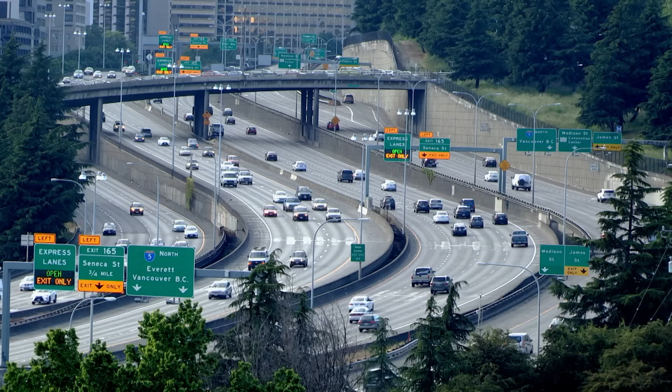King County, Washington State. Home to Seattle and Bellevue, hubs for the USA's booming tech industry. Where population is exploding and traffic is gridlocked. Engineer John Sleavin lives and works in a city pushed to breaking point. Seattle's experiencing some of its rapidest growth since the gold rush back in the 1800s.

We've had more tower cranes in Seattle than any city in the country for a number of years running. With a lot of major corporations in Seattle, the traffic's getting worse, the need for transportation is increasing, and the need for choices are increasing. The solution could be to link the cities by train. But in King County's unique environment, even railways face a problem.

One of the unique features of Seattle is its geographic terrain. There are a number of lakes that all restrict where and how you can place transportation services. And in particular, Lake Washington sits between downtown Seattle and Bellevue, both of which are high-tech areas that need to be connected. In a landscape strewn with vast bodies of water, Lake Washington is the largest and deepest. Here, traditional bridges just aren't possible.

When it comes to water, cars and trains are stopped in their tracks. Indigenous people used canoes to get around Lake Washington for thousands of years. 19th century settlers used ferries, bringing in so many boats that they became known as the Mosquito Fleet, clogging up the waterways. A more practical solution was required. But with almost 2.5 kilometers to cross and water and soft silt over 100 meters deep, neither a traditional bridge nor a tunnel could solve the problem. But engineers in Seattle have the answer.

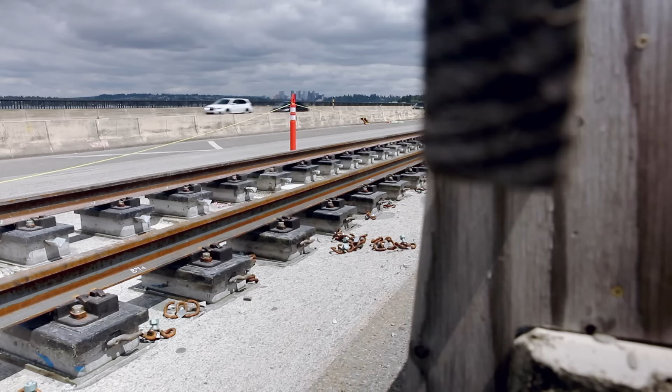These extraordinary buoyant bridges are capable of carrying 142,000 cars a day. But now they're entering the next and most challenging phase of construction. Adding a state-of-the-art train line and creating the planet's only floating railway bridge. What makes this project so exciting for me is nowhere else in the world has this ever been done. It's floating, it moves. We're essentially putting rail on a marine vessel. It's a very unique engineering achievement.

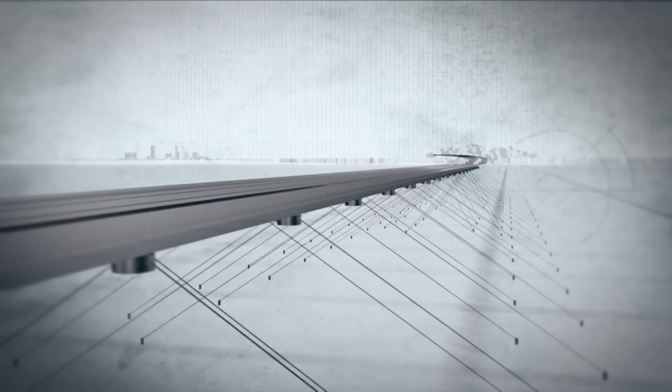With a massive 324,000 tons of reinforced concrete, the twin floating bridges weigh more than 52,000 elephants. All that weight is floating on 38 monster pontoons, with nothing but 64 meters of water below the surface, crossing a span of nearly 2.5 kilometers and capable of supporting the weight of high-occupancy rush-hour traffic. The finishing touch will be a revolutionary railway line, a world first on a floating bridge. Once this system is commissioned and in operation, this will be an engineering feat like no other.

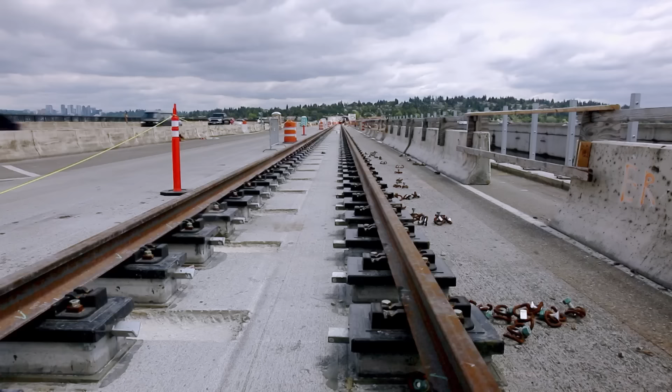But this ambitious project poses huge engineering challenges. How do you connect a railway from land onto a floating and so moving bridge? If those rails were just attached on either side, that continuous connection would experience all those movements in one point and would probably snap the rail. What happens when you introduce a high voltage current to a structure in water? There is a risk of stray current escaping from the rails, which could get into the critical bridge structure.

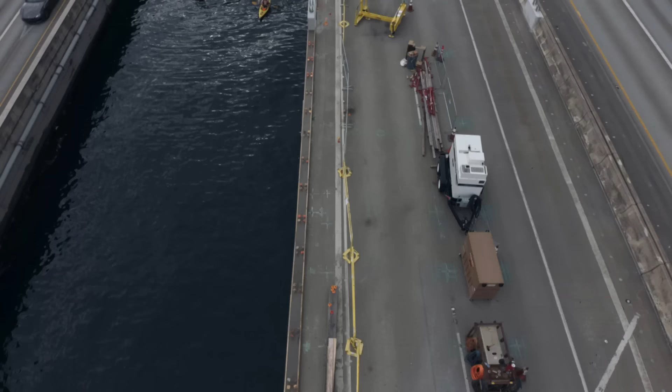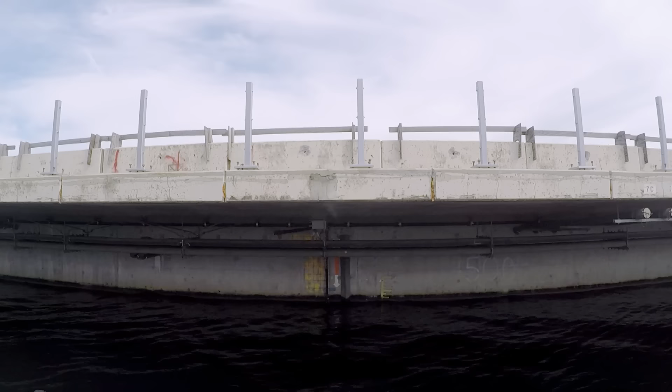And how do you make it strong enough to support 300-ton trains? We can eccentrically load the bridge and potentially crack it. That would not be good. But the biggest problem of all, how to keep the concrete superstructure afloat. It is very important that if there's any water intrusion, that won't sink the whole bridge.

Engineer Jim Stonecipher knows all too well the daunting complications of building on this lake. The lake is deep, and being in earthquake country, we need a good material to set our foundations in, and it's just not available on the bottom of Lake Washington. Before you can get to some good material, you have to go through silty sand, and so you might end up with a column that's 500 feet deep.

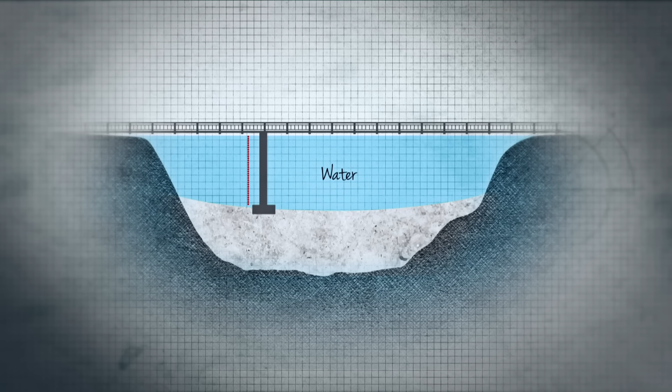Even if engineers were to sink support columns through 65 meters of water, they would hit a soft lake bed made of silt and clay. Pillars would need to go through another 50 meters of sediment to reach a solid footing. Add the column length needed above the water, and all this makes for an incredibly expensive and unstable structure.

On the engineering side, it would be difficult to build a standard cable stay or other type of bridge in that area. It takes a unique kind of bridge span to span Lake Washington. So the engineers' only option is to float the bridges. But how can they ensure the giant concrete structure doesn't sink? The answer lies with a pioneering innovation of the past.

On the Caribbean island of Curacao, local engineer Albert Zweste is exploring how a clever piece of engineering could help the team at Lake Washington. We are located here close to Panama, where they have the Panama Canal. So the island is strategically located for the shipping routes and for trade. The island's main town, Willemstad, was a perfect port. But by the mid-1800s, the deep natural harbor was creating a problem.

The town is separated in two halves, but about 4,000 people per day needed to get across. And they did it in small boats. And you can imagine it was a time-consuming and not efficient process. But the channel is 150 meters wide and 15 meters deep, with a soft sandy seabed, making most bridges impossible to build, especially one that allows the passage of ships into the harbor.

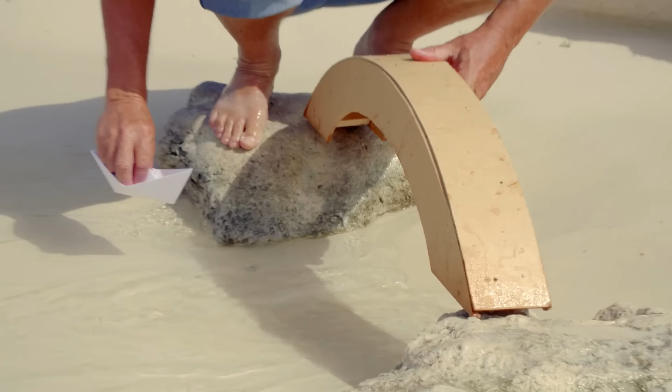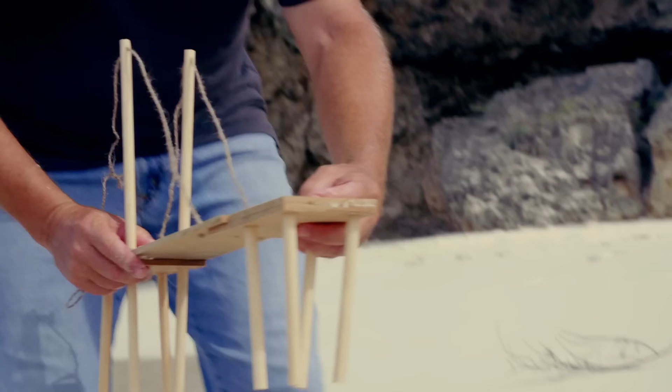The arch bridge solves the problem for vessels coming in, but only small vessels. An arch bridge would be expensive to create the arch and to make it high enough for larger vessels to come in. The bascule bridge is an option that gives us the possibility to open it and let traffic go in and outside the harbor. It doesn't need to be that high. So we can pull on this, open it up, and my vessel can go in or out.

The problem with the bridge is, though, I need heavy foundations in a town that's already been built, in a deep channel with soft foundations. So this bridge, although beautiful, is not an option for this site. But when American ice merchant Leonard Burlington Smith sailed into Curacao in 1876, he had the answer. So this is what Smith came up with.

This is the Queen Emma Bridge, a wooden pontoon bridge with 17 pontoons stretching across this channel, the Anna Bay. Affectionately known to the locals as the Swinging Old Lady, it's one of the oldest pontoon bridges in existence. This bridge uses about 600 tons of wood, each pontoon 15 tons of steel. You see it moving? We are now completely floating on the water.

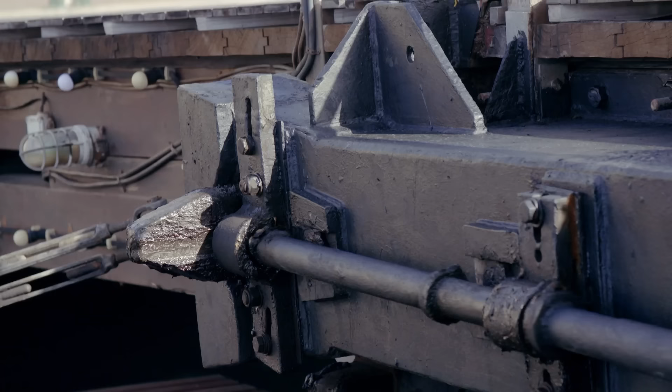But the brilliant pontoon design not only allows for transit between each side, the floating bridge has another trick up its sleeve. We've got a boat coming now, so we need to open the bridge all the way up to let this boat get out to sea. The impressive 167-meter bridge span is hinged at one corner and swings open, allowing boats access to the harbour.

To be able to open the bridge, we have two motors, one in forward, one in reverse. Together they push and open the bridge. We get oil tankers, we get container vessels, we get cruise vessels come in here, all kinds of vessels. It was genius. It was a quick solution, an efficient solution, and a relatively cheap solution. Smith's design was brilliant in its simplicity. Located just beneath the public concourse lie the vital components that will prove significant to the engineers of Seattle.

Okay, we're here on one of the pontoons. The pontoons are the most important feature of the bridge. All this weight is carried by the pontoons. No columns are needed to anchor this bridge into the sea bottom.

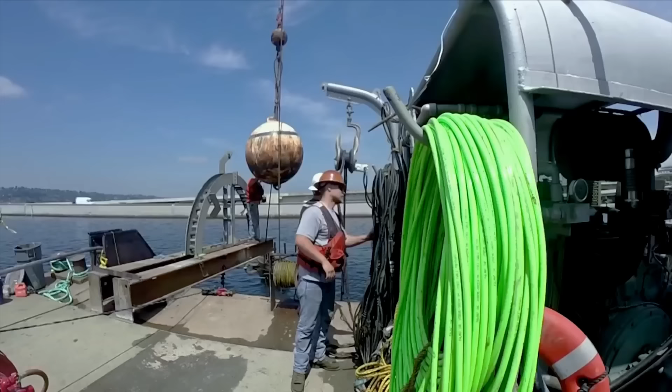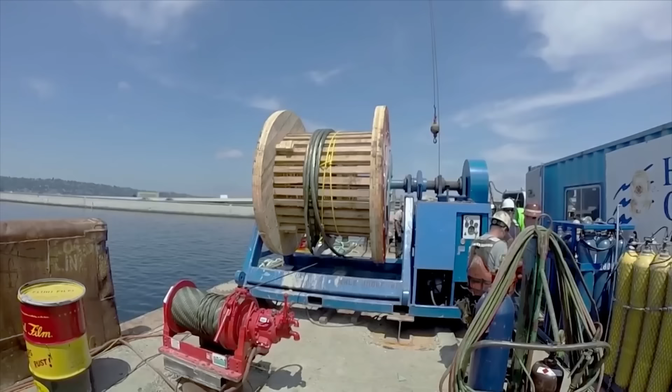Buried in the lake bed, movements from the bridges put immense pressure on these anchor cables, causing them to fray. Nope, I got a cable here. So, to prevent catastrophe, a team of divers working at depths of up to 165 feet are currently replacing damaged components. The anchor cables are very heavy, and it takes a real big team to get those anchor cables in place. So far, 32 huge new cables have been installed.

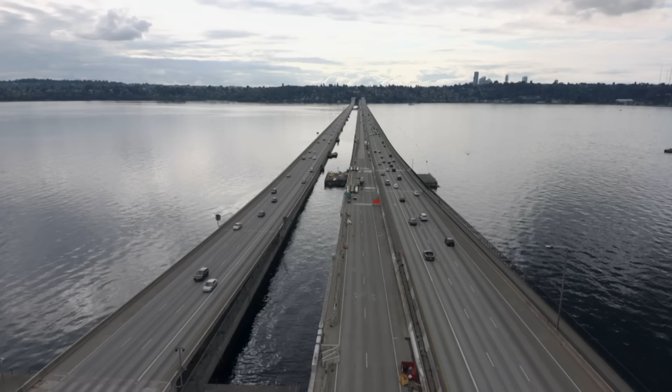But seasonal change means that monitoring them is essential. From summer to winter here on Lake Washington, as the lake raises and lowers, the anchor cables become slack or tight. And we don't want increased pressure on the bridge, or we do not want the cables to be slack. A rupture in the cables could spell disaster for the bridge. So it's crucial that, as the lake's water levels change, the anchor cables are adjusted to the correct tension.

So now we're down inside of one of 18 pontoons. Watch your head, a little rough. We're walking in through the anchor cables in one of the segmented compartments of the pontoon. And this is the anchor cable on the pontoon. This particular anchor cable is 579 feet long. To haul such an enormous cable in these tight spaces, you need a compact yet powerful piece of equipment.

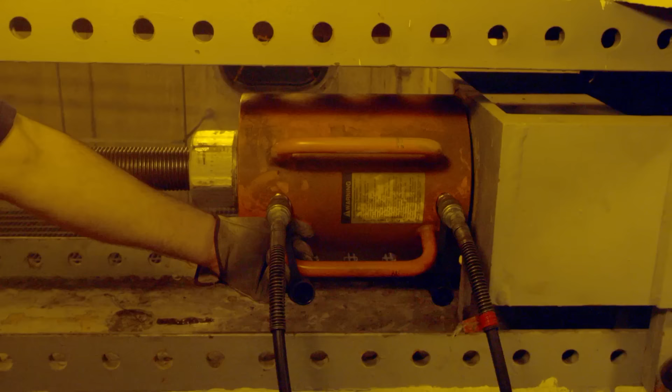So this is the jack that we use to actually make the adjustment. This is a 150-ton ram. We use this to either extend the cable out a little bit or bring the cable in to maintain a 65-ton average on the cable. The jack pulls with phenomenal force, but all Jim has to do is press a button. So you can see the travel of the cylinder right there. We're actually very slowly pulling the cable in.

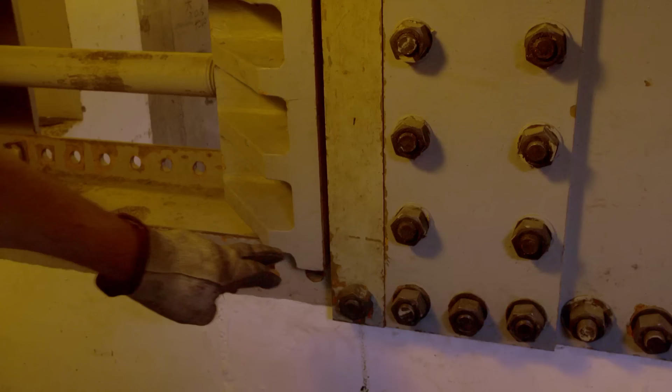Over here in the other room, you can see we have this air gap between the jacking plate and the jacking head. And so we're actually pulling the cable into the pontoon. So now we've gained about an inch. So we're gonna put shims in here. These steel plates will bear the load when the jack is released. Right now, this time of year, we only have to move it probably an inch. In the spring and the fall, we'll move it about 6 inches.

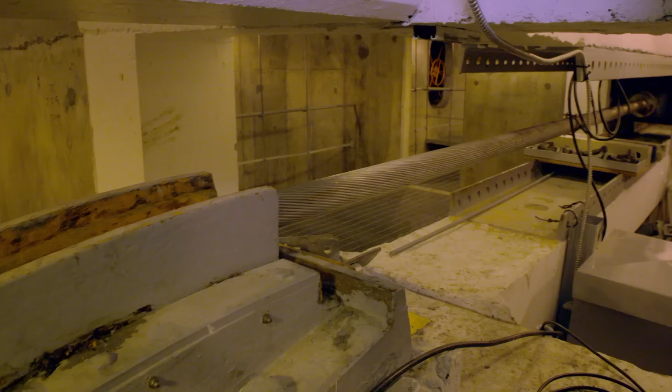Adjusting the 110 anchoring cables is vital for keeping the bridge in alignment and maintaining a safe road surface for more than 50 million vehicles every year. So if we didn't have these anchor cables, eventually this bridge would float north or south depending on which way the wind's blowing. End up maybe in somebody's backyard, and that'd be a pretty big dock for them.

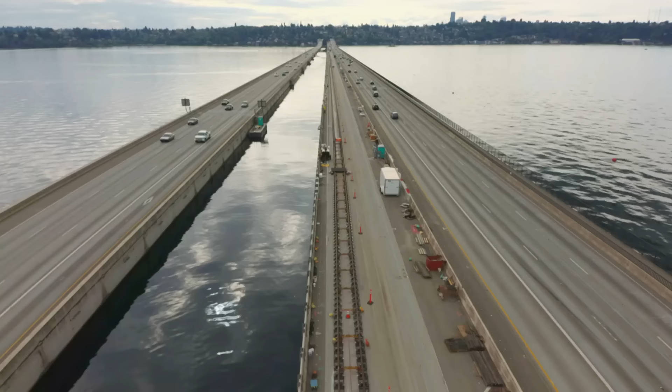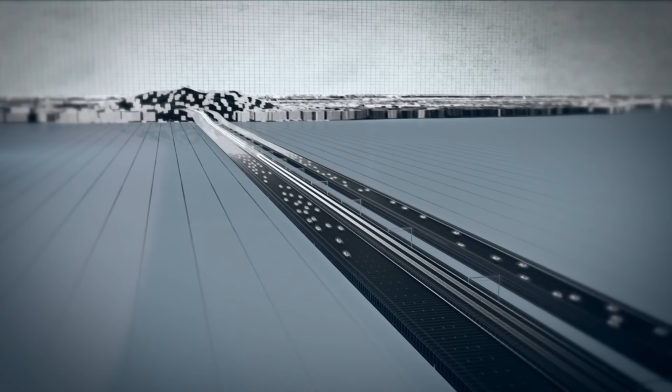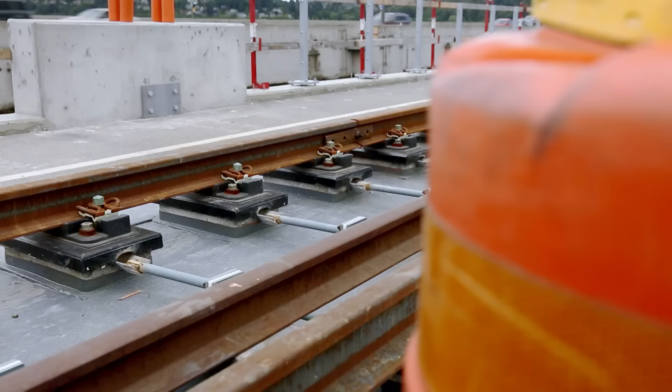Across a combined bridge span of 4.8 kilometers, these 38 jumbo pontoons support a lifeline for millions. Without these incredible floating bridges, the city would be gridlocked. Construction of this groundbreaking project is underway. To my right is the first set of tracks. There'll be 2 sets of tracks here when the construction is complete.

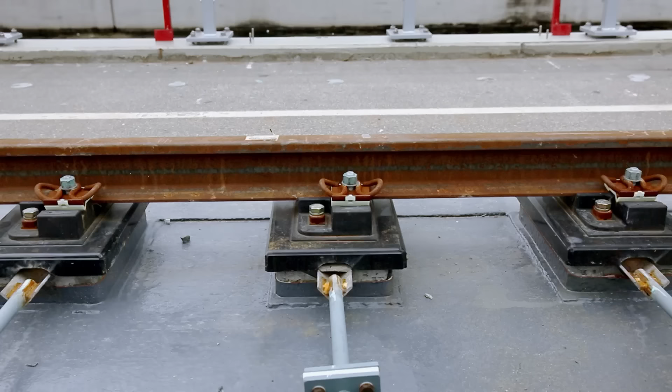But the new tracks create a unique danger that engineer Craig Delala must overcome. The rail system is powered by a 1500-volt DC system. The return path for that current is the rails here. Nowhere has anybody put a 1500-volt rail system on a floating bridge in the middle of a lake. But water and electricity famously don't make a good mix. If electricity escapes the tracks, it could spell disaster for the bridge.

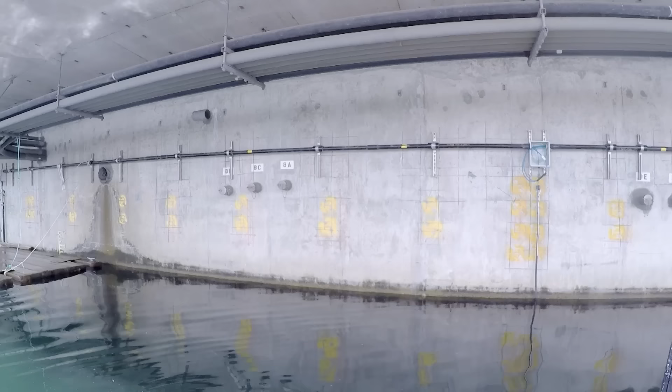Surprisingly, the danger isn't one of electrocution, but of corrosion. So anytime you have a steel structure, the risk of rust or corrosion, which is the loss of metal, could impact the bridge. By introducing rail to the floating bridge, it further increases the risk of corrosion to the bridge and the bridge structure. When that current discharges into the water, it can corrode crucial components at the exit point, threatening the integrity of the very bridge itself.

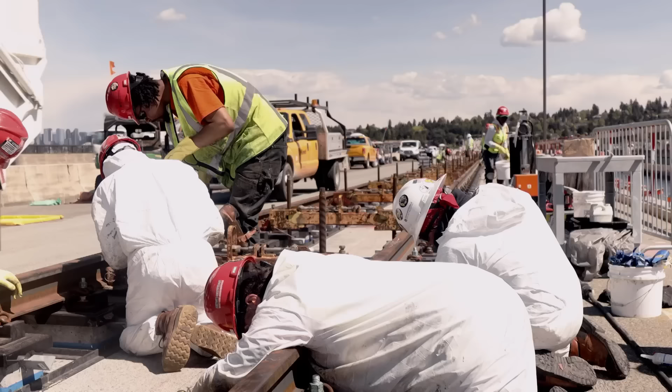For this world-first construction project, Craig's team needed to come up with entirely new methods to eliminate destructive stray current. So you'll see here that there's multiple elements of isolation, including plastic pieces here between the track and the fastener. We also coat the bridge with a special dielectric material that is also a high insulator for electricity. And so with these elements, we are able to protect the bridge from any stray current ever making its way onto the bridge.

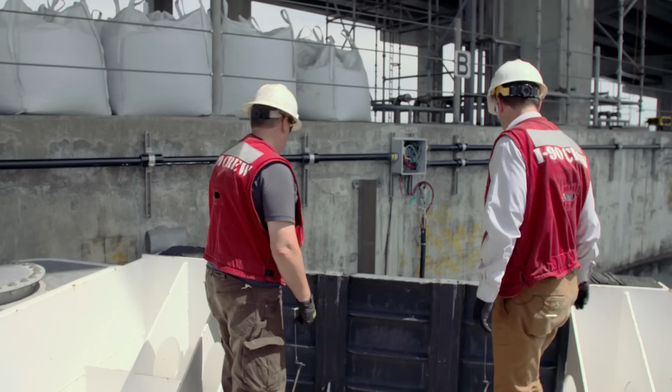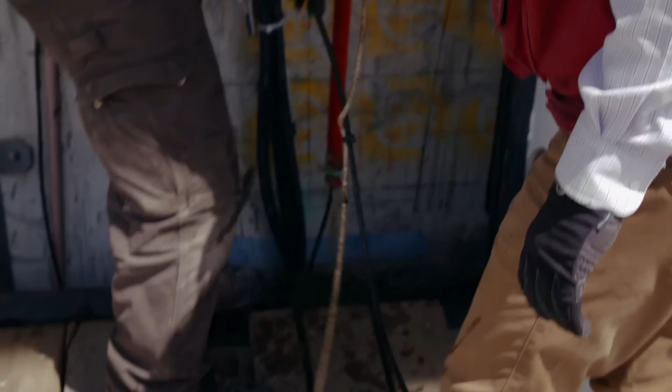But with this mighty structure at stake, engineers aren't taking any risks. To move these barriers out of the way. Should any stray current make it through the first line of defense, there's a backup plan. This is going to be harder. The anode assembly is the one without a tape here. Okay. So what we have here is the anode coming out of the water.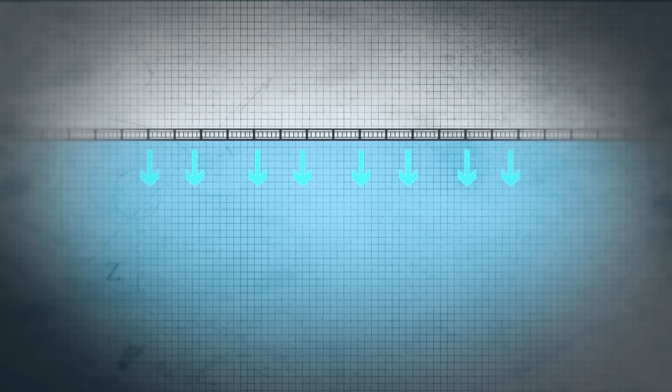There's 8 of these that hang 50 feet down into the water. These are mixed metal oxide anode assemblies. These put current into the water, which is drawn into the bridge and allows the bridge to polarize. Left unchecked, stray current could enter the lake through bridge metal. But over 1,400 anodes feed another electrical charge into the water. This protective flow drives into the bridge structure and holds the stray current at bay, saving crucial components.

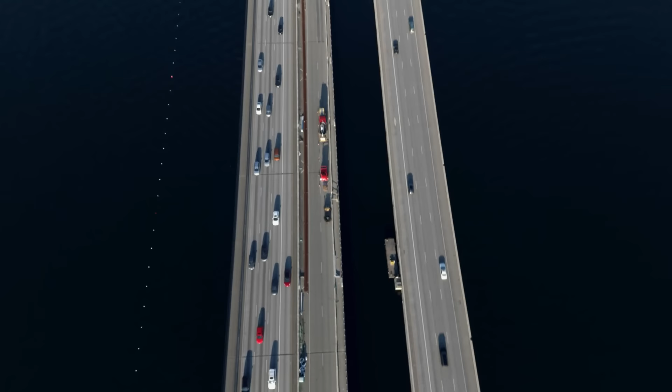Without corrosion control, the life expectancy of the bridge could be shortened. Applying it to a floating bridge like this is really something extraordinary. The danger of corrosion has been eliminated. But as rail installation advances, an entirely new threat looms over the project. So right now we're about to go across the bridge. Keeping the mission on track is engineer John Sleavin.

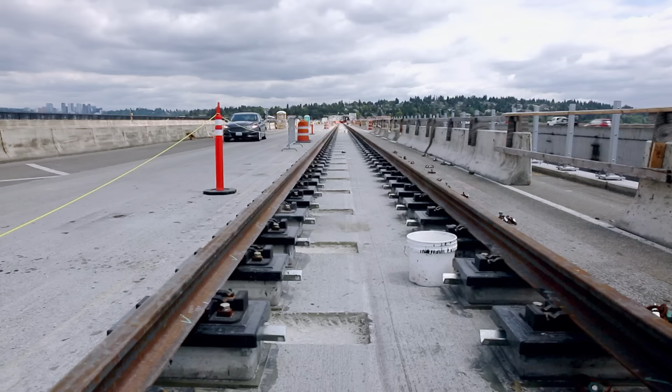As we transition to a floating bridge, we are on a floating structure. And just like any marine vessel, it tends to move a little. Now for an automobile with rubber tires, they can go across an angle point or a bump quite easily. And this is very difficult for a train because steel rails need to be continuous. They can't have break points or angle points that could potentially derail a train.

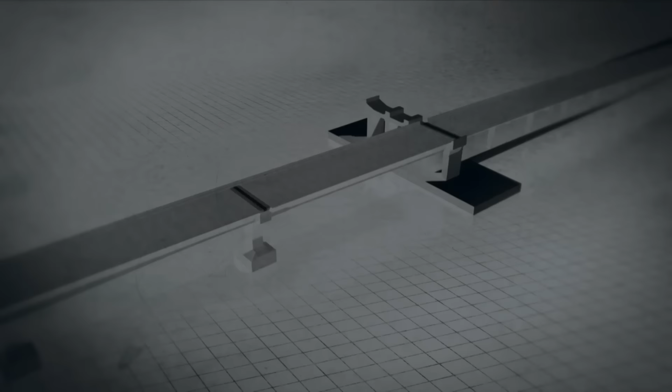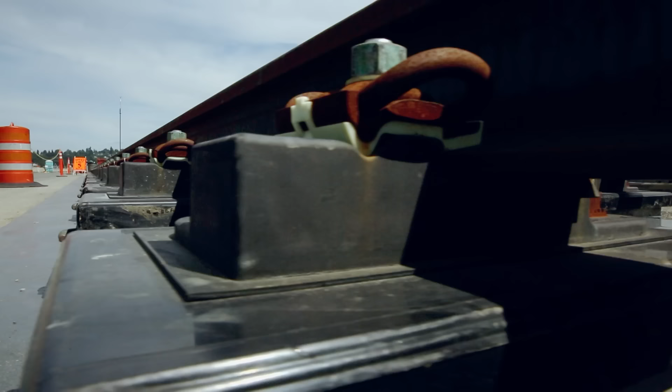The floating bridge needs to contend with a range of movement caused by lake levels, wind, and uneven traffic loading. This stretching and twisting at the joints constantly changes the transition angle, threatening a track misalignment between lake and land. For 800 passengers on a speeding train close to heavy traffic and deep water, this could be fatal. We need to find a solution across that expansion joint that's critical to the operation of the rail. To evade a devastating derailment, John's team must connect with innovators of the past.

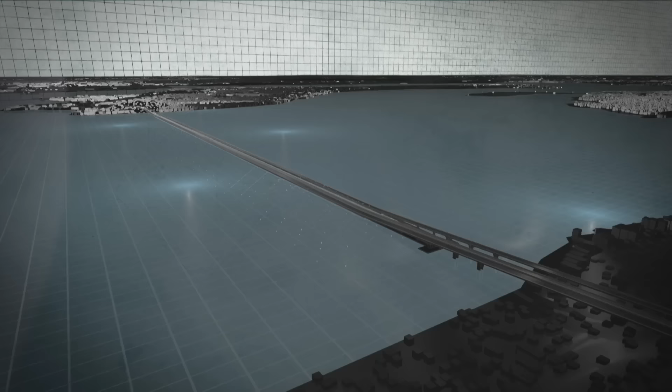Norway, famed for its vast fjords. Civil engineer Bertha Dongmo Angeland is on the hunt for a relic from the golden age of locomotive travel. In the beginning of the 20th century, the quickest and most efficient way for factories to export their goods was by train. The only problem is to get access to the railway line. Those factories are located on the wrong side of the lake, and trains don't float.

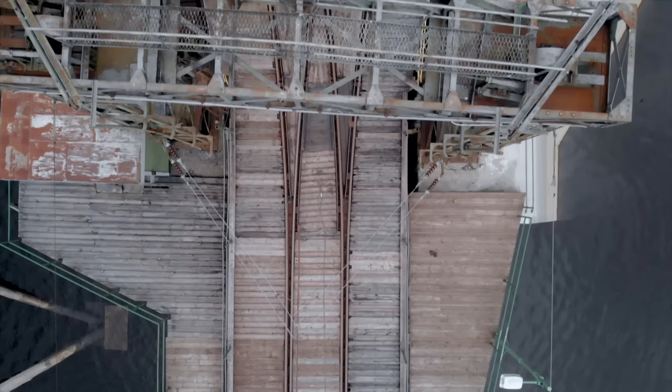Scottish engineer Thomas Bouch encountered a similar problem when extending Great Britain's railway lines. But in 1849, he came up with a solution that would roll out across the continent. The railway ferry. Wow, look at that. This is so amazing. Bouch's concept of a ship with inset rails enables locomotive wagons to float across water.

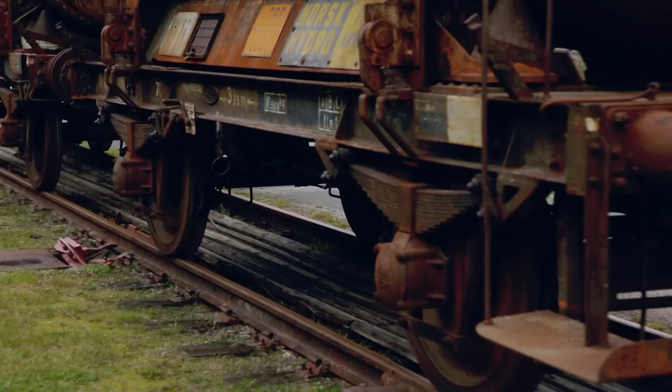This ferry here in Norway follows closely Bouch's design. When the railway ferry came here in 1909, it was a wonderful opportunity for the factories to export their goods by rail, and we are lucky enough to see it today. But the ferry itself is only part of the story. Once the wagons have reached the end of the line on land, there's still the problem of getting them onto the barge. This is the most delicate part of the operation.

It's very important that the boat and the pier are at the same level. A misalignment of the track would be catastrophic. And with lake water levels constantly changing, Bouch needed a clever solution. I have my miniature lake here, and the water level is low. And we have a gap here that can cause some problems for our train. So basically, we need to find a way to connect those two tracks together.

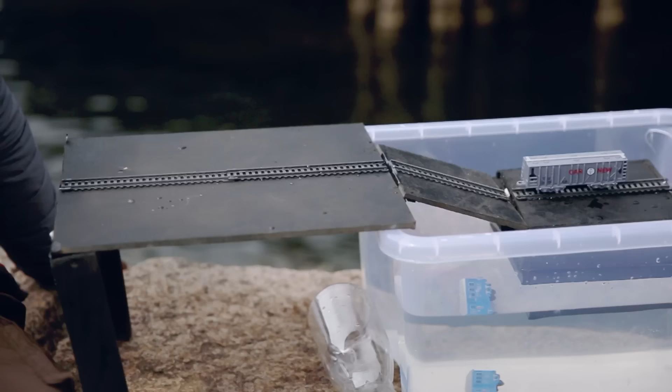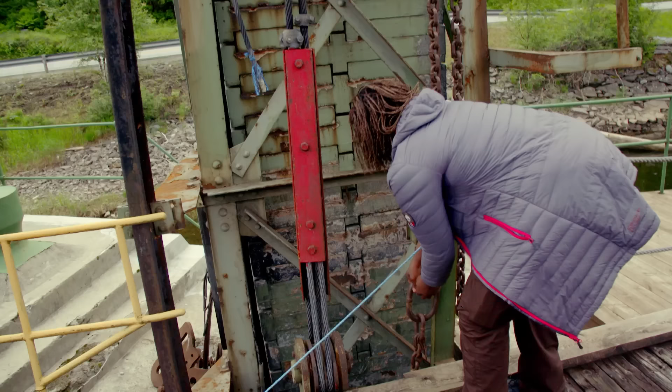The solution to this problem here is to use a hinged ramp that can move and allows us to establish a connection between the dry land and the floating barge. And our train can now smoothly transition from dry land to the floating part. And the most important part here is that the hinge allows us to change the angle so that we can accommodate any water level. It's simple, but brilliant. The adaptability of Bouch's hinged ramp is a concept that will prove instrumental for the team in Seattle.

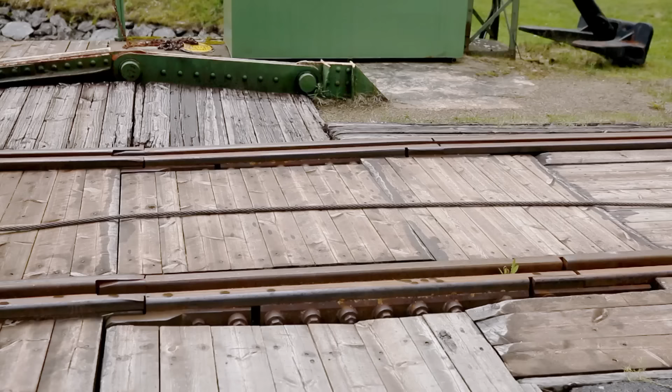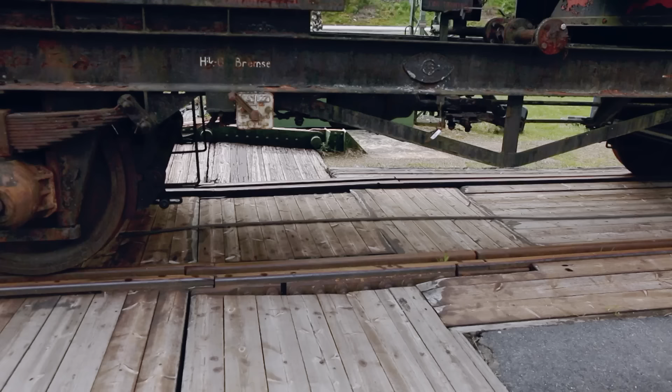So we are going to bring the ramp down and connect it to the ferry now. With the help of an enormous winch system, the span is lowered and tracks perfectly aligned. This transition ramp, starting exactly here, is hinged on one side, so that we can lower it or raise it, so we can always have this perfect alignment with the ferry. Connecting these tracks provided a lifeline for the region's industry, with an astonishing roll-on, roll-off solution. It's impressive. It's really cool to see this.

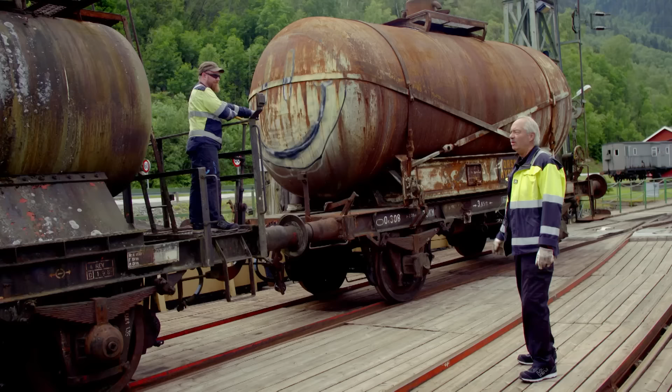The remarkable railway ferry and hinged ramp configuration kept cargo wagons on the move and changed European locomotive transportation forever. This innovative concept was a game changer. Trains don't float, but vast lakes and fjords like this one were no longer an obstacle. And it's quite amazing to see that design still in action 100 years later.

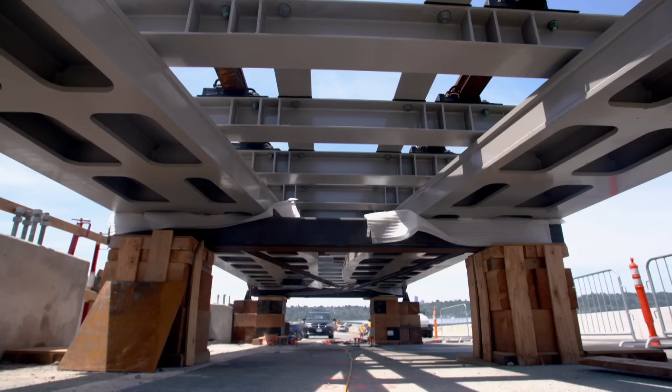170 years after Bouch's inspired idea, Seattle's greatest engineering minds have developed a system that he could have only dreamed of. And so this is our solution. We call this a track bridge because we're bridging over that expansion joint. And it's an amazing solution, actually, that we came up with. This unique design has to deal with conditions not seen on any other railway bridge in the world.

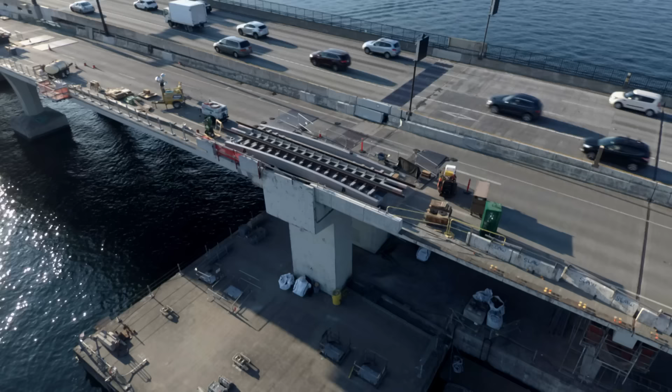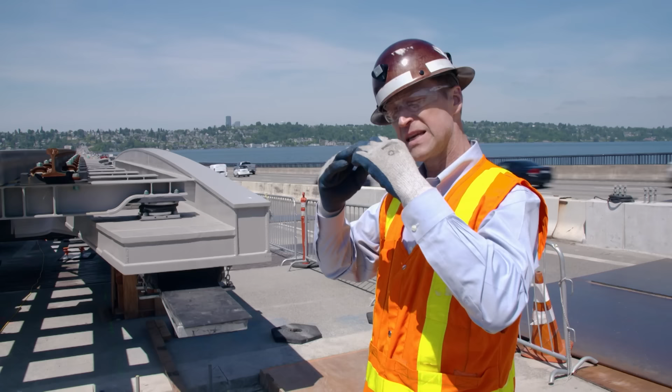We had looked at some other systems, but this has two more degrees of motion that don't exist on other bridges. What we have is a system to try to handle all those different levels of movement, but rather than happening in one point on the rail, we've spread that over a longer distance. And how have we done that? Through a lot of components. As we go underneath here, we can see some different elements. Each of these wings has a curve to them.

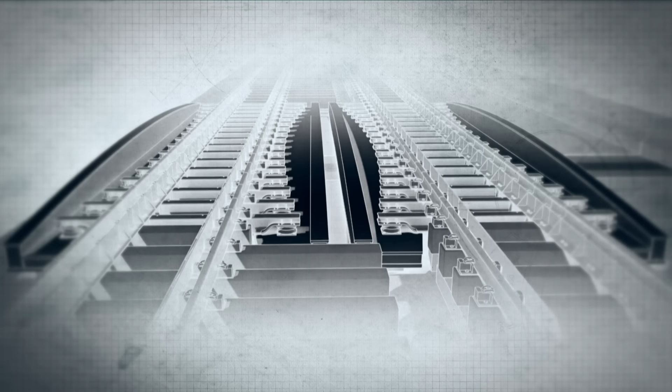That means when the bridge goes down, because the lake level goes down, these wings will rotate up. And when the opposite happens, these wings rotate down. These curved wings work in unison with a complex range of components to bend the rails into a gentle arc and keep them level over the moving angle points. Eight of these 13-meter-long track bridges will cross the four hinges between fixed and floating segments, allowing a smooth transition for the trains. After the complex track bridges are assembled, the system has to undergo extreme scrutiny to ensure safety, speed, and efficiency.

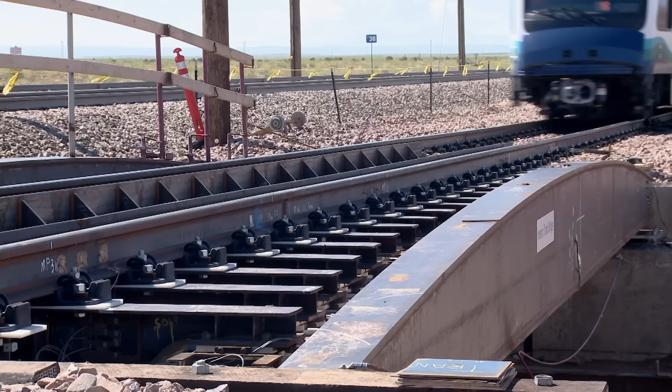So they're thoroughly tested at a special facility in Colorado, producing 500 channels of data. Our test revealed that at our design speed, our maximum speed of 55 miles an hour, the track bridges were good, the stresses in the rails were fine, and the ride for the passengers was comfortable. If we didn't have this track bridge, it probably would have been impossible to put trains across the bridge. At the very least, we would have had to stop the trains and almost just bounce across it. At its worst condition, that may have even caused the trains to derail at that low speed.

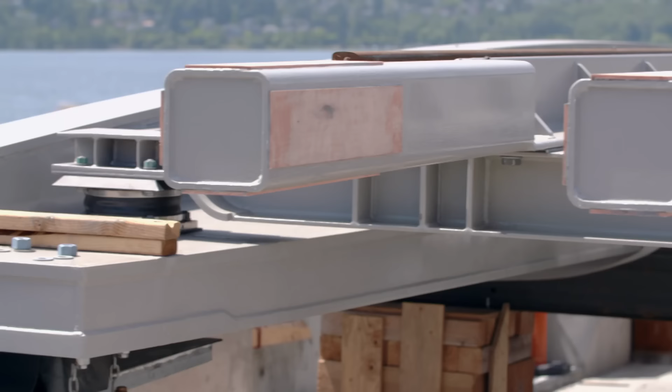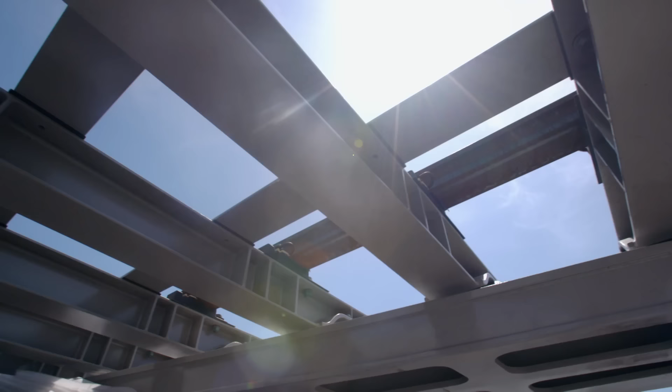With this incredible world-first design, Seattle's engineers are one step closer to conquering the seemingly impossible. This is a completely new and unique solution addressed just for this specific location. Nowhere else in the world are there any track bridges like this. We have thousands of daily commuters that rely on this, as well as sports fans and university students. Engineer John Sleavin is in charge of the project.

So when these trains are fully loaded, we'll have 4-car trains, and each car will weigh approximately 175,000 pounds. So when 2 trains are passing each other, essentially doubling the load, which is very heavy in one spot, that puts a lot of stress on the concrete. A massive 4-carriage train at maximum capacity could weigh 350 tons. When 2 trains pass, that's as much as 700 tons bearing down on a short stretch of bridge. This crushing load can put enough stress on the concrete to cause catastrophic ruptures.

We've done a lot of structural analysis on these loads and realizing it takes a lot of stress into the bridge. And so to preserve the lifetime, we need to figure out how to strengthen the bridge. So how do you reinforce the concrete to withstand the full force of hundreds of daily train crossings? It's a challenge that might be impossible without the innovators of the past.

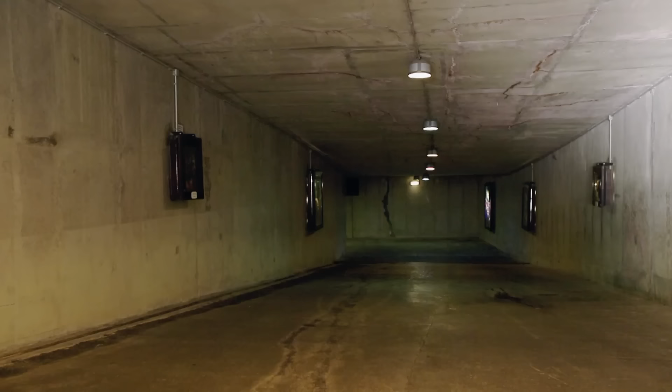The city of Lourdes, southern France. An important holy site for Catholic pilgrims from around the world. Civil engineer Patrick Nagel is going underground in search of a structure with the capacity for a colossal congregation. Wow. This is the Basilica of Saint-Pius X. I'm completely awestruck by this building. It really is impressive. It's built beneath the city to protect views of the sacred site above ground.

What is striking about this magnificent building is a wide open space. No central columns, no supports. And we can see the structural form of the 29 arches running the length of the building. And this creates a usable space of over 10,000 square meters, which can accommodate 25,000 people. But this subterranean structure seems to defy gravity. The flatness of the arches is maybe something we wouldn't expect. A typical arch is much more like this. These are very flat arches. It is clear that something special here is happening from an engineering perspective.

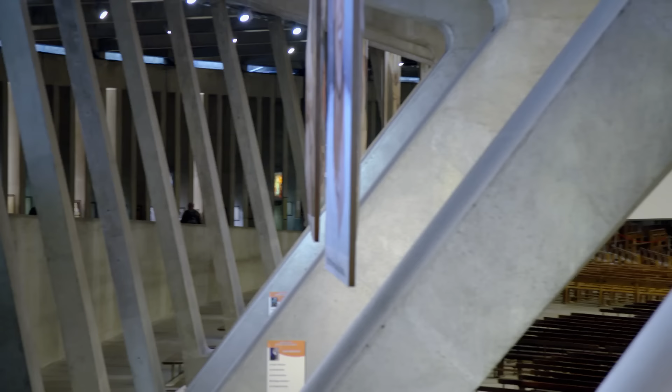Engineering enlightenment came from Eugène Freyssinet. In 1928, he perfected a method of concrete strengthening using strands of steel cable under high tension. This technique, known as post-tensioning, provided support for concrete beams of unprecedented spans. But hidden within the concrete, it's not easy to see how this system works. So here we have a simple model. We have a number of wooden blocks which represent a concrete beam resting on 2 supports. And you will see a string running through the beams, which is simply there to hold together the blocks.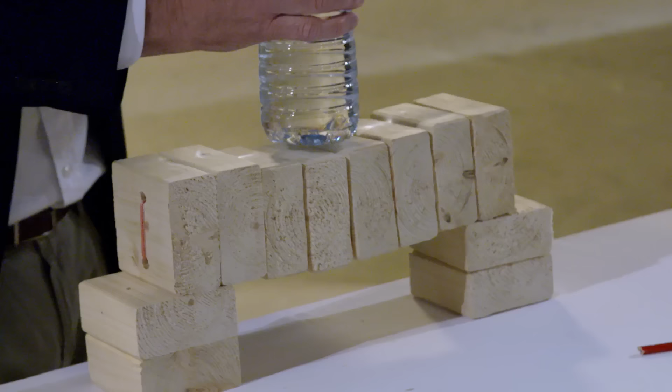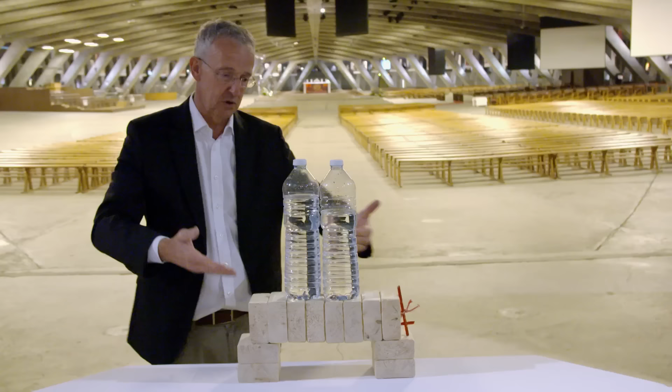If I apply a load to the beam, you will see that it is put into bending, and you can see cracks opening up within the concrete. So the secret is to put in compression before the load is applied. To achieve the compression needed, post-tensioning must be introduced into the beam. So in this case, it is provided by string and a tourniquet to tension the string. So I have now tightened up the stressing, if you like, and we put this back on the supports. So this time we can apply double the load, and we can see that there is no movement and the beam does not go into bending. This gives a much more efficient use of the concrete and allows us to provide bigger spans and more efficient use of the material.

By compressing the beam, its density and strength is increased, a method that could prove vital for Seattle's bridge engineers. So essentially what we are doing in the beams, in the arches behind me here, is applying an external force to increase the load-bearing capacity of the structure. The tendons that we see in here are formed of steel strands housed within ducts and stressed by hydraulic jacks after the concrete is hardened.

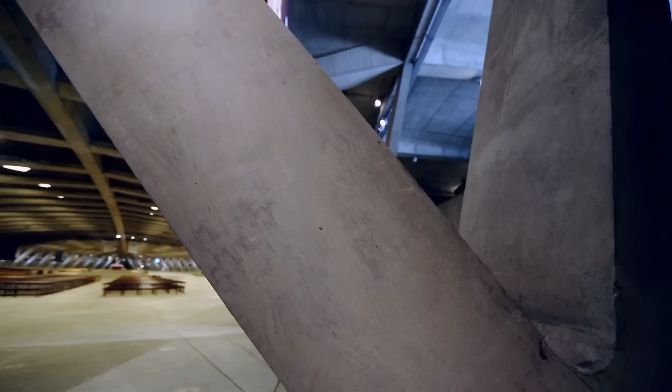The strengthened concrete provides a vast ceiling without the need for obstructive pillars. Instead, arches span the chamber and descend to the floor close to the edge. Looking at the structure today, there are no cracks. It is very finely designed to make sure we maximize the capacity of the concrete. The long, shallow vault of this hall would not have been possible without Freyssinet's miraculous post-tensioning solution.

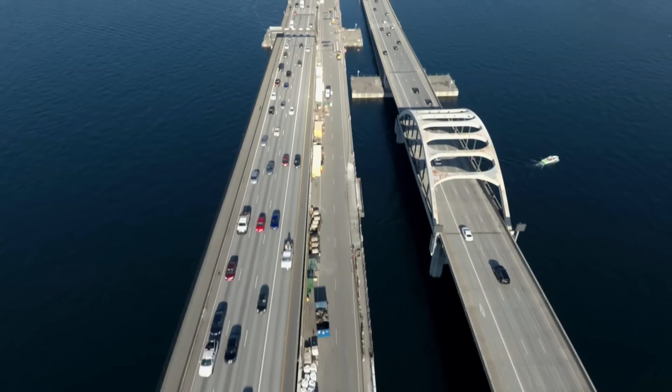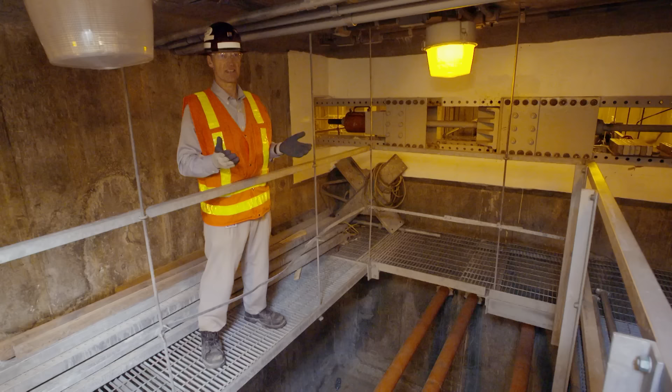Today, we see it used in all major structures, bridges, buildings, dams, and without it, we would not be able to achieve some of the beautiful and brilliant structures we see around us today. At Seattle's floating bridges, engineers are applying Freyssinet's groundbreaking technique on a world-beating scale. Just like at the Basilica, they're fortifying concrete through extreme compression. So what we've done to strengthen the bridge is put post-tensioning cables in the bridge.

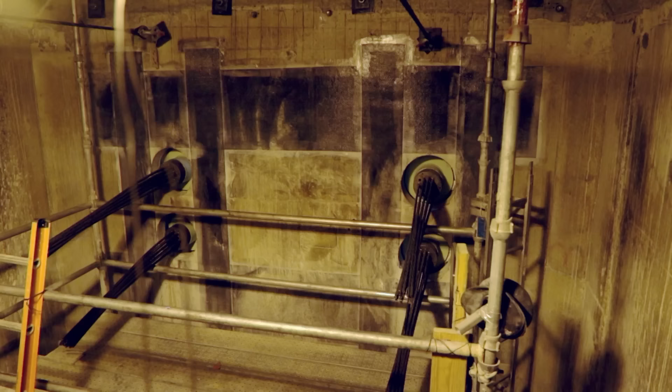But the supersized system on Lake Washington is using some of the longest post-tensioning cables the world has ever seen. So these cables are approximately 4,000 feet long, running from one end to the other, one continuous cable in each one of these conduits. Very unique in this situation that we've added 4,000 feet of post-tensioning. Most post-tensioning is much shorter, 100 to maybe 200 feet.

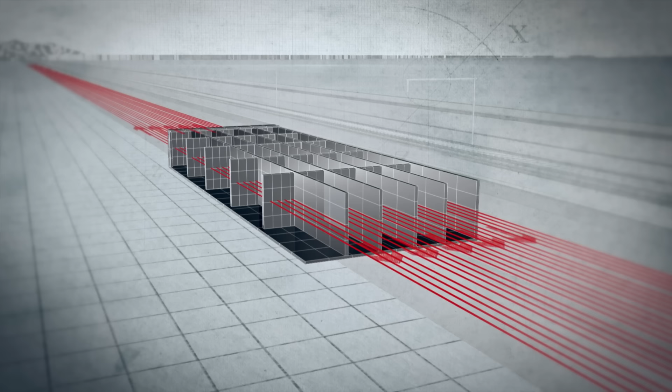With a combined length of 24,000 meters, 20 of these steel supercables are threaded through the pontoons, spanning the North Bridge's floating platform. Powerful hydraulic jacks then pull them tight with immense force. So what we've done is we've put conduits through the bridge. Those conduits are then used to string the cables through that, and then we pull those cables tight.

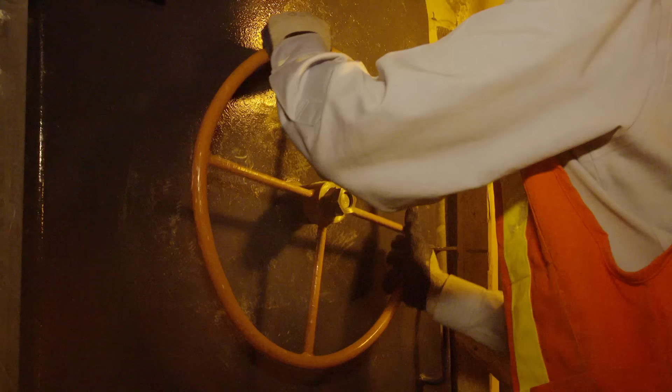But keeping a post-tensioned monster cable in place requires oversized anchors. So here are the reaction frames inside the bridge. These are the big steel frames that we pull tight against when we tension the post-tensioning cables. So their job is to hold the post-tensioning cables tight so that we put that force into the bridge to strengthen it.

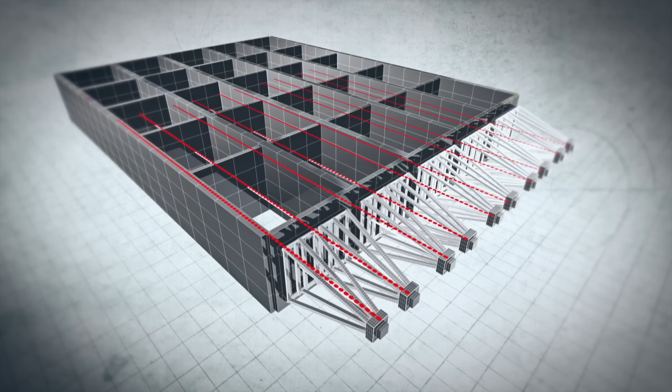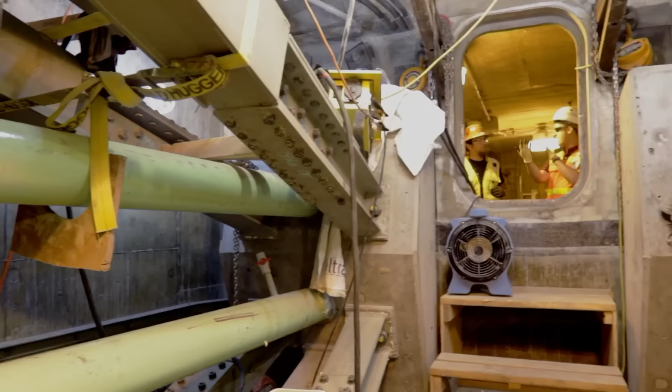20 massive reaction frames weighing 7.5 tons each are pulled inwards by the tensioned cables. Like huge bookends, they squeeze the bridge from either side. Compressing the concrete increases its density and so strengthens the bridge to take an even mightier load. Applying extreme compression to the structure has to be executed with pinpoint precision, to within 1.5 millimeters. These frames are critical. Without them, there's no way we could have added post-tensioning.

The result is a super strong floating platform capable of withstanding the 700-ton point load of 2 trains crossing simultaneously. So this is an incredible solution to the problem. Extremely long post-tensioning cables added to a bridge, allowing us to add the trains to the surface of this bridge.

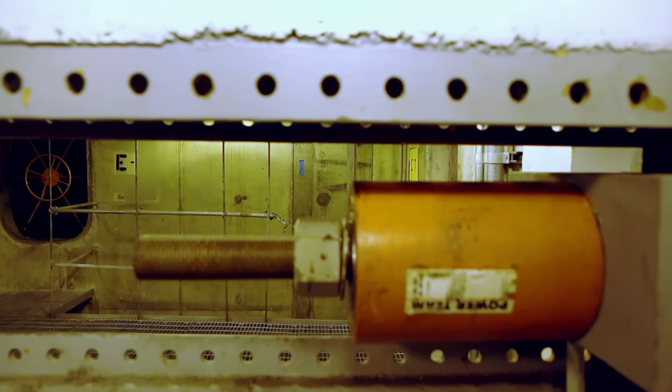For the team behind this daring project, the engineering achievement is immeasurable. The floating bridge is an amazing structure. It's critical to our region. This is one of the most challenging projects I've ever been involved with. Because of all the unique items, you can't just go take something out of a design handbook. You have to think about how each one individually interacts with each other to make the system as a whole perform well. This has been a great project, and I can't wait to see it start in service.

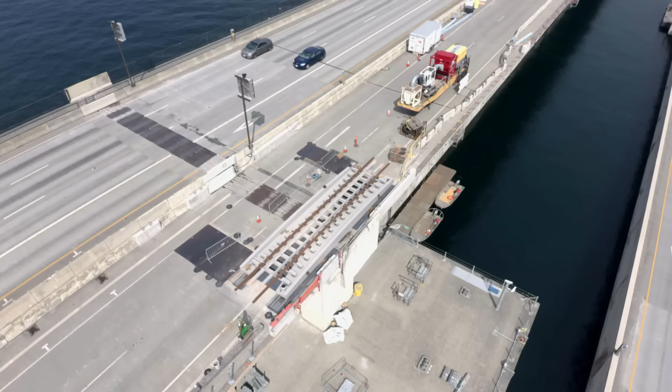The unparalleled twin bridges that have defied the impossible, spanning a previously impassable lake, creating a lifeline for a population of millions. And their brand new crowning glory, stretching thousands of meters from shore to shore, all stand as testament to the incredible work of some of Seattle's greatest engineering minds. The I-90 floating bridges represent impossible engineering on a staggering scale. Every stage of this groundbreaking enterprise poses extraordinary challenges.

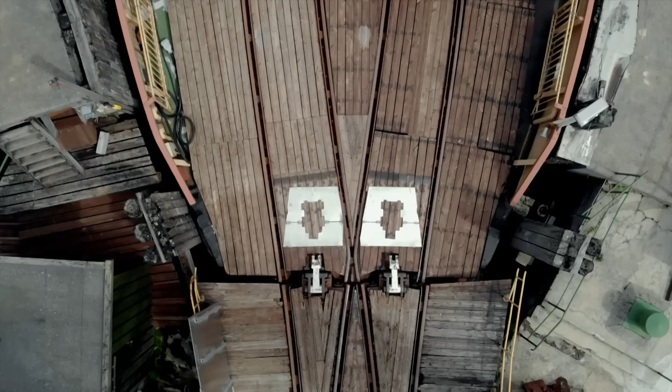There are many facets and many people involved in this design, and it's been really great working on this. I'm really proud to see it coming together. By building on the work of the pioneers of the past, overcoming huge challenges, and pushing the boundaries of innovation. This is some of the most incredible engineering that I've ever seen. It's extremely exciting for me and my team to be able to work on not only an important project, but a unique project. The engineers are succeeding in making the impossible possible.